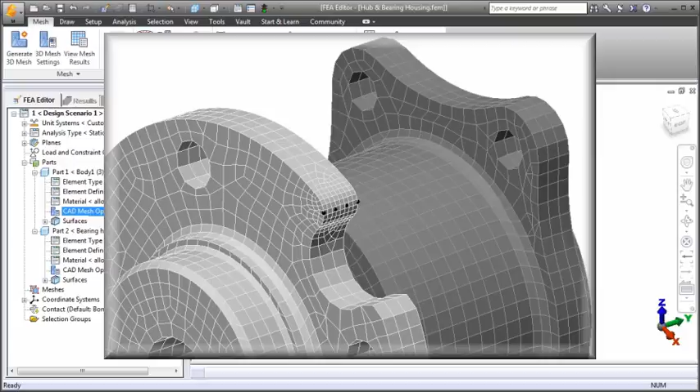Meshing is a critical part of the finite element analysis process. In Autodesk Simulation Mechanical, automatically generated meshes can be based on CAD solid or surface geometry from many sources, as well as on 2D outline sketches. Structured or hand-built meshes are covered in a separate video.

The hub and bearing housing assembly pictured here is an example of a mesh based on a CAD solid model. The overwhelming majority of the surface area is covered with quadrilateral element faces. In the same manner, the solid mesh engine attempts to fill the majority of the volume with 8-node brick elements, also called hexahedra. The default solid mesh is a hybrid of hexahedral, wedge, pyramid, and tetrahedral elements, with those of the highest quality placed near the surface where stresses are critical. Lower quality elements are used when necessary to fill the innermost volume of the parts.

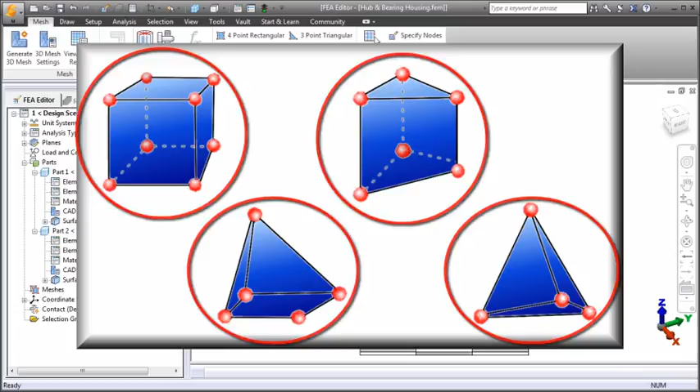You can control the mesh size globally, on a per-part basis, or locally by applying mesh refinement to selected vertices, edges, or surfaces. This image shows the local mesh size reduction resulting from refinement points added to the original surface mesh. Global and local mesh refinement utilities are also provided to automate the process of mesh convergence, that is, the progressive refinement of a mesh until stable analysis results are obtained.

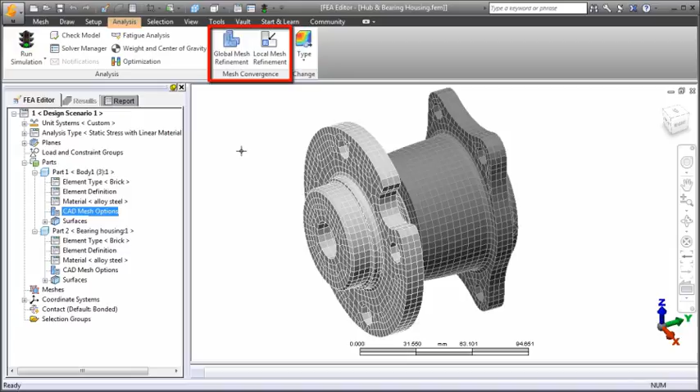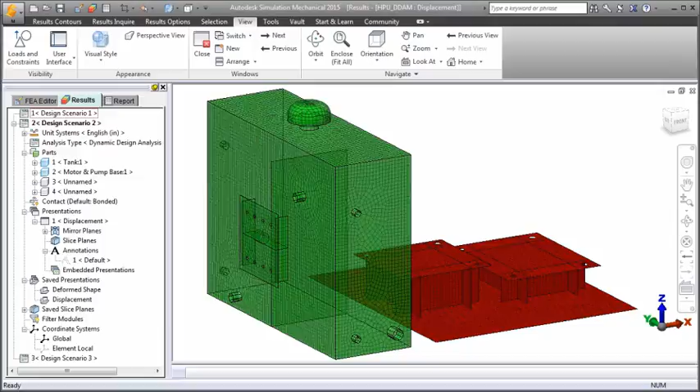Plate or shell type elements can be generated from CAD surface models, as this example illustrates. For solid models of thin parts, which would best be analyzed using planar elements, the mid-plane meshing option is available. This option collapses the CAD solid model to surfaces at the mid-plane of the part thickness, as this example demonstrates.

You can perform 2D mesh generation on outline sketches created on a plane of any orientation. The resultant 2D meshes can be used for any planar elements or extruded into solid elements. To run a 2D element analysis, the mesh must be generated on the global YZ plane. The sketch can be drawn within Simulation Mechanical or imported from an AutoCAD DXF file. The outline can also contain multiple parts.